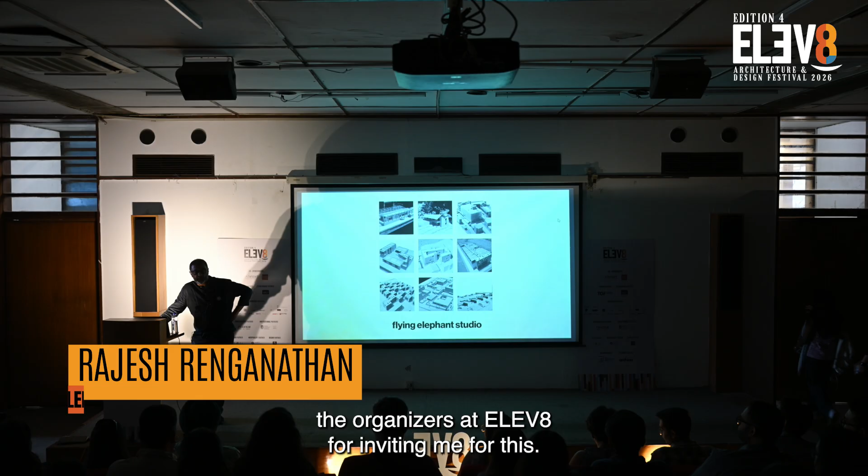Thank you to the organizers at ELEV8 for inviting me for this. It's always a pleasure to come to Ahmedabad, and we spent our formative years of architecture in this city, and we have a very strong emotional link with this place. And being in this building itself is something exciting. It's always nice to come to the Mill Owners, and personally, a building which has influenced me a lot.

So what I'll try to do is go through a selection of projects. I think there are about 8 projects that I'll run through, which in some ways may represent some broad trajectory of the kind of work that we're doing. So 2 of them are older projects of a smaller scale. Then there are 2 ongoing projects which are still at site and not yet complete, but I think they are of a different level of scale and complexity, which I would also like to talk about. And then there are some, over the last 10 years, a few of our institutional projects which have actually been completed.

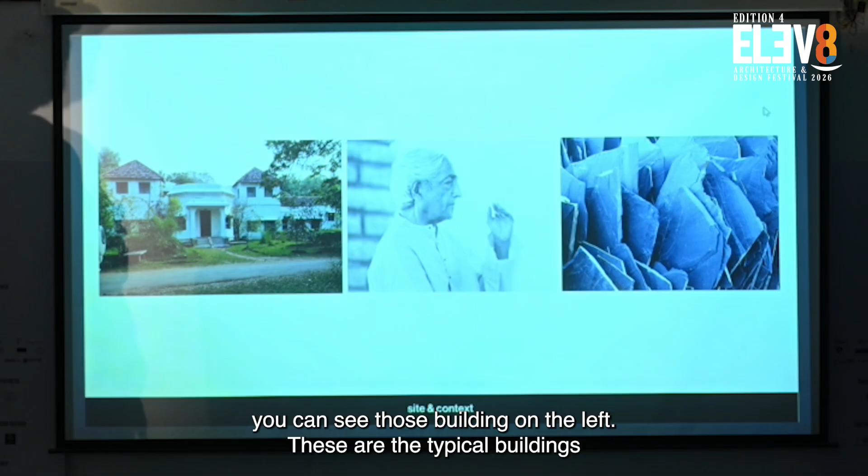And you can see this building on the left. These are the typical buildings which exist on the campus, very frugal and nice. There's also Kadapa stone there, which is used in that region of Andhra Pradesh. So it's kind of funny because it's a very high quality school, but you get a lot of privileged children who come there eventually and can pretend to be poor for a few years before they go back and get along with life.

So this was the building that we were asked to do, the senior girls hostel, as a dormitory project. And over here we had this very complicated relationship with the clients. We had 2 clients actually. One was the client who was donating the money and who selected us as architects. And then there was the school, so each had their own agenda.

The client wanted a certain kind of aesthetic, and which they came to us, but the school had its own priorities in terms of what they wanted out of the project. So it's a senior girls hostel, so there was a lot of tension between creating something which is closed and at the same time something which is set in a very beautiful natural setting and wanting to open out towards it.

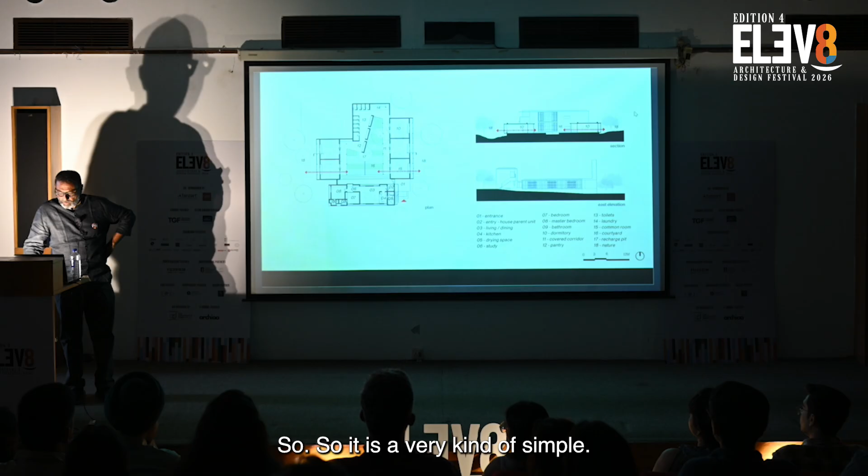So it's a very simple, sort of cloister kind of plan, and would have been a simple courtyard, but for an existing building which was there. And the way it works is that you have a cluster of 4 dormitories, each with 4 students, and then they have another building which is part of this complex, which is what they call a house parent. So a small 2 families live along with the students.

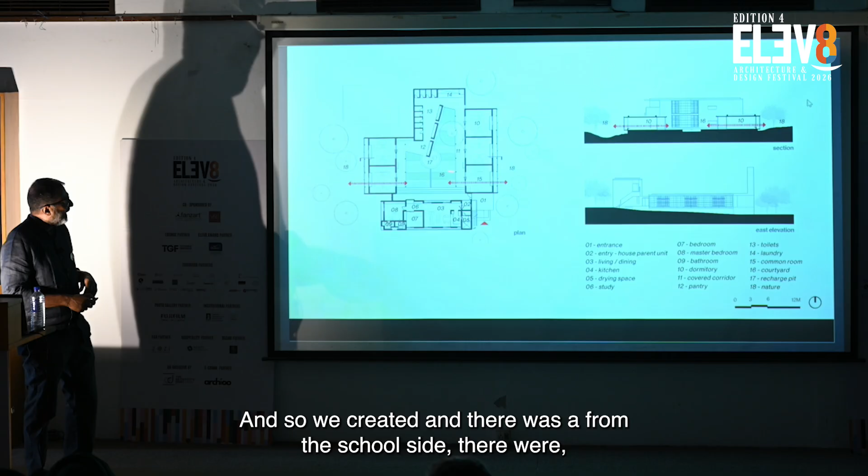And so we created, and from the school side there were worries about the safety of the girls. Being adolescent girls, they were very protective. So they almost wanted us to make some sort of a fortress, in terms of the entry and the visibility, so boys should not be able to come inside. And so this whole thing about supervision commands a view of the whole courtyard. There is no movement that can happen there without supervision.

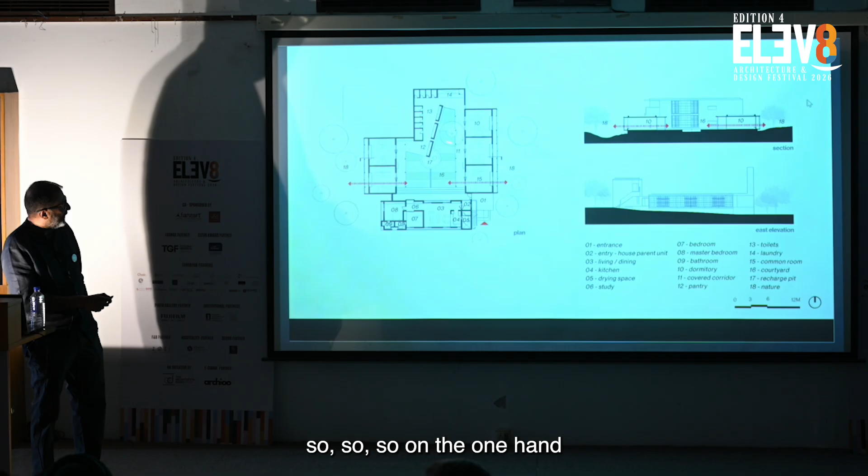But then outside it's all wooded, so on the one hand you create this kind of community space which is within the courtyard, but the rooms themselves, the dormitories, are open on both sides - on one side to the community area and then into the forest outside.

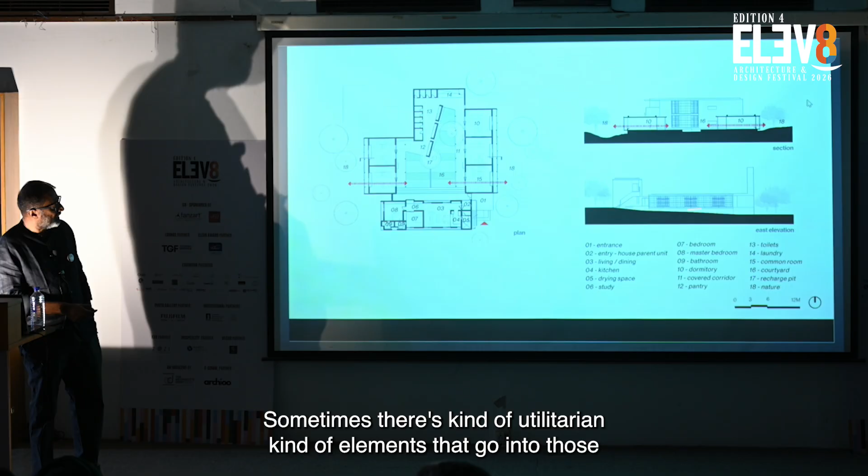And this was also one of the projects where we started working with these kind of layered facades, which combine various functions. Sometimes there's the typical weather protection, security grills, sometimes some utilitarian elements that go into those layered facades. So it's a theme which continues in a lot of the projects after this.

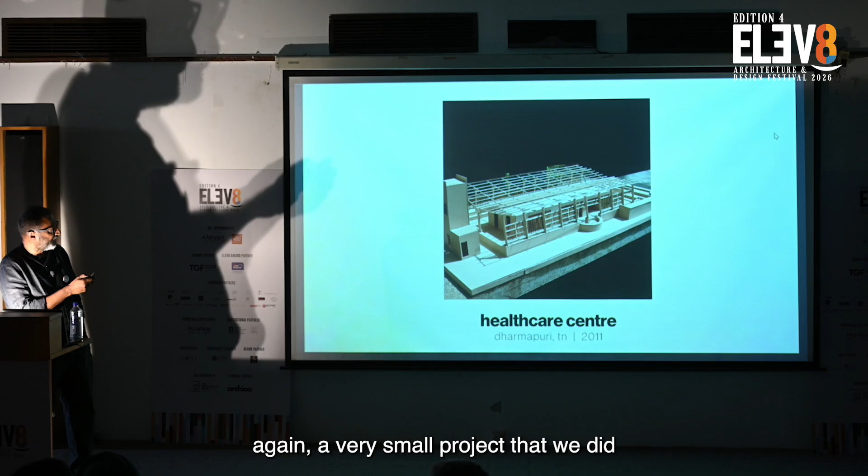So this is, again, a very small project that we did around the same time. It was just a primary healthcare center in Dharmapuri, Tamil Nadu - about 18 kilometers from Dharmapuri town, and it serves about 4 or 5 villages in that vicinity. It provides basic healthcare in terms of doctors and some testing facilities, so people don't have to actually travel to the town.

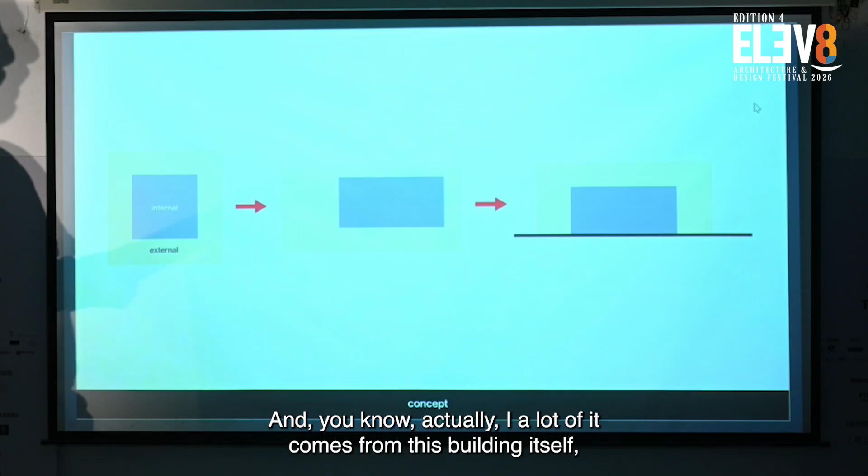So here again, another theme we've been working on, which is basically like a building within a building idea, and we've done it in several projects. Actually a lot of it comes from this building itself, which is that big box with a lot of objects inside. So it works very well even in terms of the climatic situation, being very hot, extremely hot and dry in this area.

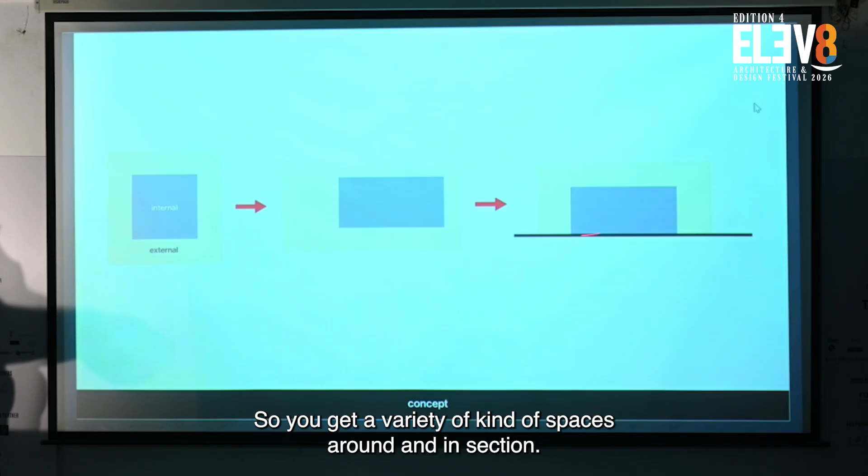So basically you start with the idea of an outer envelope and an inner core, surrounded by a buffer layer, and then this becomes a rectangle which is eccentrically arranged, so you get a variety of spaces around, and in section the same thing happens - you basically have this small core building within the larger building.

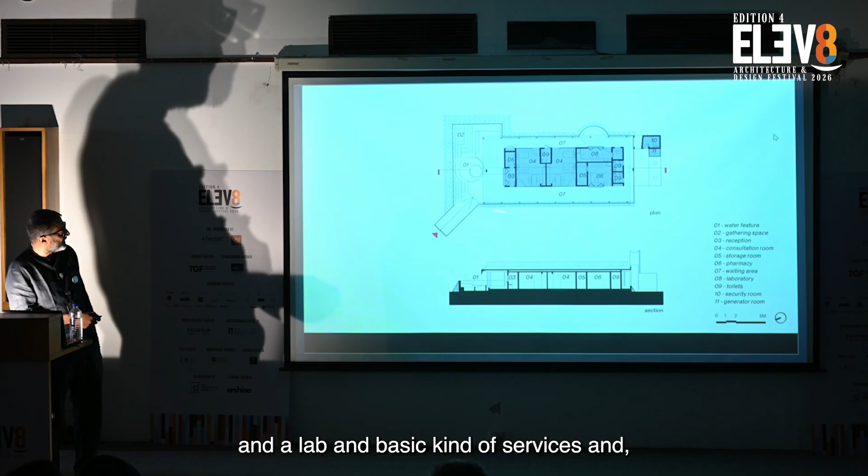So this was built at a very low cost. What I did was that the inside building was a proper sealed, secure building, which could be built to a decent spec, completely secure. You have the consulting areas again, which are open on both sides and well ventilated, a pharmacy and a lab and basic services, and a comfortable waiting area which opens out to the landscape, service area behind, doctors area behind.

And then I think because we had a little bit of savings from all the measures that we were taking, we got a little bit of extra space, which was a community gathering space, where they hold public health programs and things like that.

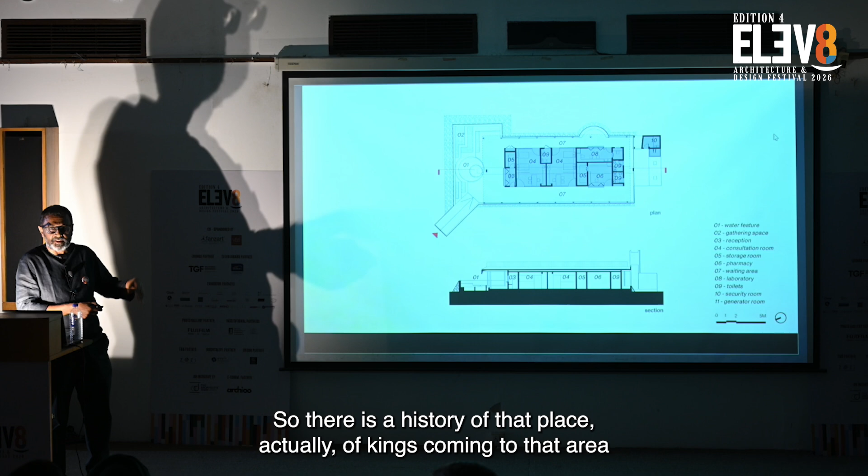And this place itself is called Devara Udu Palam, which means God's own spring. There is a history of that place, of kings coming to that area, and of some springs where they visited. So this idea of water as a life-giving element - this is actually built by a Christian trust - so the idea of water as a life-giving element was important.

Yeah, so it's basically a very straightforward kind of approach. There's a plinth, a large plinth, and then you have the core building which is a conventional RCC structure with an RCC roof which has that big gutter which collects the rainwater and puts it out into a water element there, and also stores it.

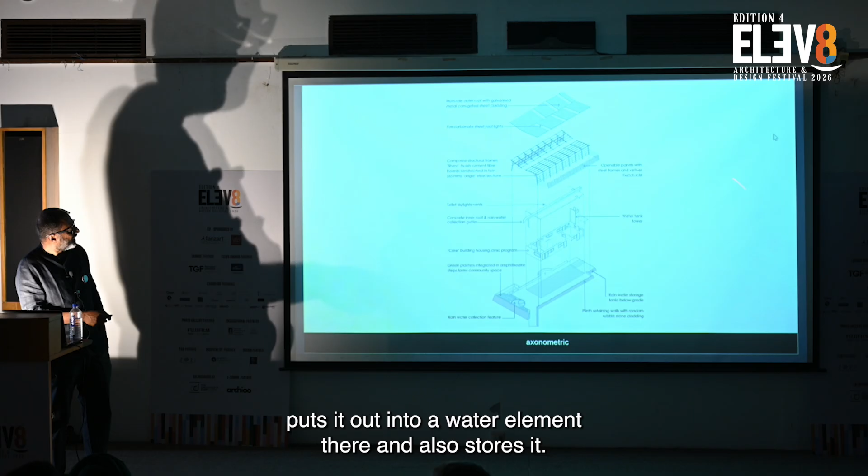And then a very light steel frame which is built on the outside, which has these louvred panels made of vetiver grass, called khas, which you can wet, and it creates this sort of evaporative cooling effect. So this was a very economical outer layer, the outer building, and of course a GI sheet roof on the top.

A lot of the stone was gathered from the site - it's built on one agricultural plot, so when you clear the site, you actually gain stone, and you construct the plinth out of that. And these screens which are there on the roof - a lot of the services are kept on top, so you don't need to get light even for the service areas, in the gap between the two roofs.

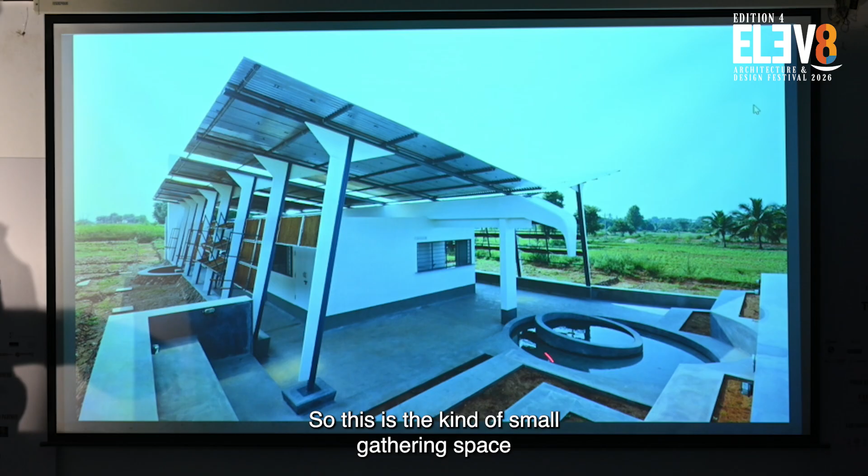And this is the kind of small gathering space that you get in the front, which is used for a lot of events. And the waiting areas, where you can control the amount of light that is coming, or the amount of protection that you want.

And of course there are different situations depending on the time of the day or time of the year. This was at the opening.

So yeah, this was again part of a family of a theme, this kind of layered facades, and sometimes using the space between the two layers rather than it just becoming an insulation layer.

So then I'll just jump to what's happening currently, and go through two larger institutional projects.

It's a large science museum which is being built, almost finished, in Patna in Bihar. So it's the largest science museum in India, probably one of the largest in the world. It's about 4 lakh square feet, on a 20-acre site, in the middle of Patna city.

So this was won through a competition, and these are government projects. Our client is the government of Bihar, and there's a series of projects which were won through competitions, and are of a public nature. So this is one of them.

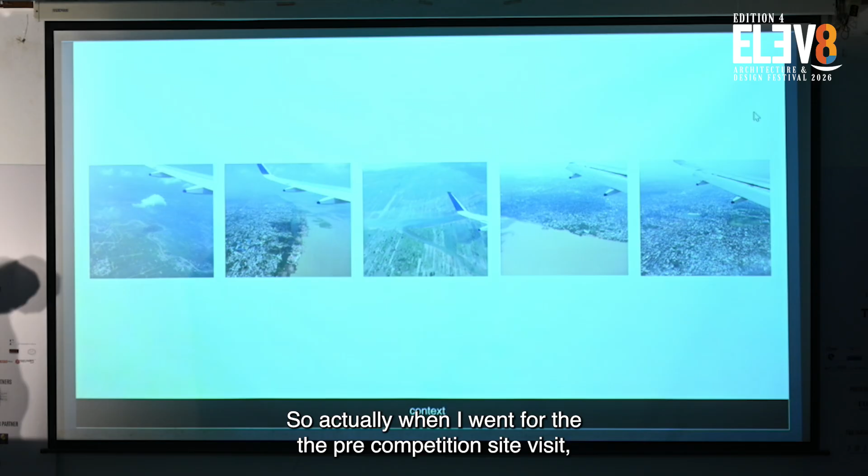So actually, when I went for the pre-competition site visit, I fell asleep on the flight, and when I woke up, we were flying over the Gangetic Plain. You could see it was post-monsoon. There was water collecting in various areas, and before you knew it, you were hitting the Ganga, with these brick kilns there.

And then as you cross the Ganga, you could see these tracts of - in these islands - this kind of agricultural, temporal agricultural practices. And then you cross the Ganga and you reach Patna over there.

And as the plane banked into its flight path, I actually noticed that we could see the site from the window. So our site was actually there. It was an interesting thing - this whole waterlogging, and the site itself being a low-lying waterlogged site.

That night, I spoke to some friends, landscape architects in Philadelphia, Anuradha Mathur and Dilip da Cunha, and told them about the site - I sent them these photographs, and they got very excited and said I should look at this. They sent me some material - Dilip was writing a book about some of these monsoon landscapes, and from that we discovered this whole thing of these areas where you have very heavy monsoon and flooding which happens.

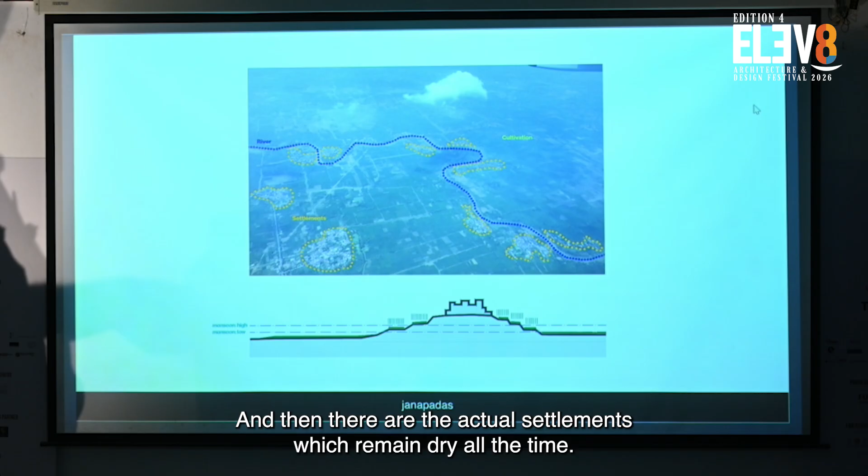What happens is that the settlements are built on the high ground, and then there is fluctuation in the level of water all around. There are places which could be wet all the time, like the actual path of the river, places which are wet some of the time and dry sometimes, and the actual settlements which remain dry all the time. Along this variation along the gradients, there are all kinds of agricultural practices that happen, which keep shifting as the season changes from wet to dry.

So this became a starting point for the project, and our site, again from that point, is sort of a panhandle kind of configuration.

As you can see, it's completely waterlogged, in a low-lying area. It was completely filled with garbage. The stadium is out here, the access is from one point here, and then there is this Nalla which runs — it's called Saidpur Nala, which is completely full of sewage and garbage. Not a very pleasant kind of site.

And as you can see, the site does retain water over a longer period of time, even when it's not raining.

So from the inputs I got from these landscape architects, I sent them a sketch which said that maybe the site can be divided into a low ground and a high ground along the periphery. The low ground accommodates some kind of water system and plantation, and the museum is on the high ground, with movement where visitors come in and service goes around. So when you look at it, this divides it into a low ground, high ground kind of situation.

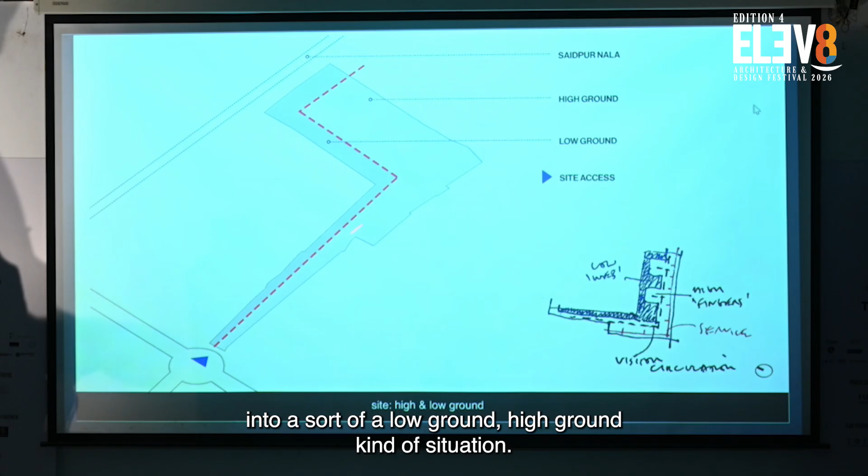So then it really becomes two projects in one. What we proposed in the competition was, one, the museum, which was part of the brief, but we also proposed a public park, which we initially wanted as a through and through thoroughfare, but that didn't eventually happen. So there were two parts to this project.

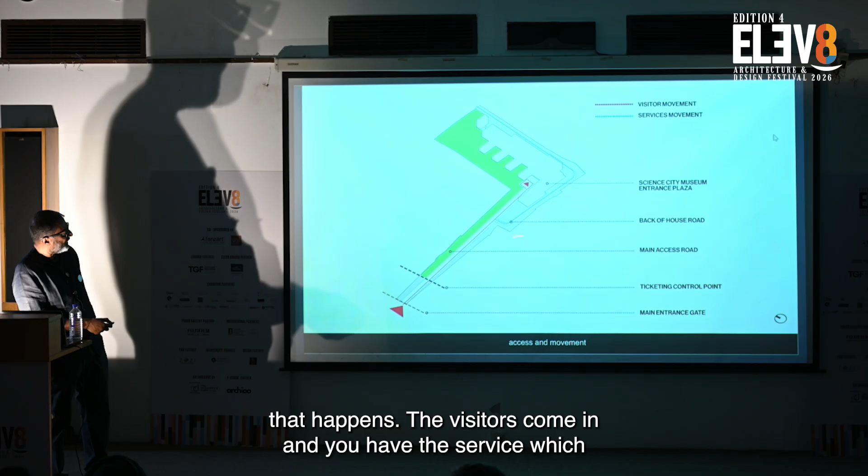And then of course, how the museum actually works — it becomes a sort of finger, these interlocking fingers of landscape and building, the high ground with the museum itself and the low ground which is the park. And then you have the circulation that happens, the visitors come in, and the service wraps around the whole thing.

Just to explain the program very quickly, you arrive at an atrium, and then you have some of the core programs around — the permanent exhibition on one side, temporary, and then a lot of public functions. And then of course the back of house and other kind of program which supports. There's a huge infrastructure that goes into even the back of house of a museum.

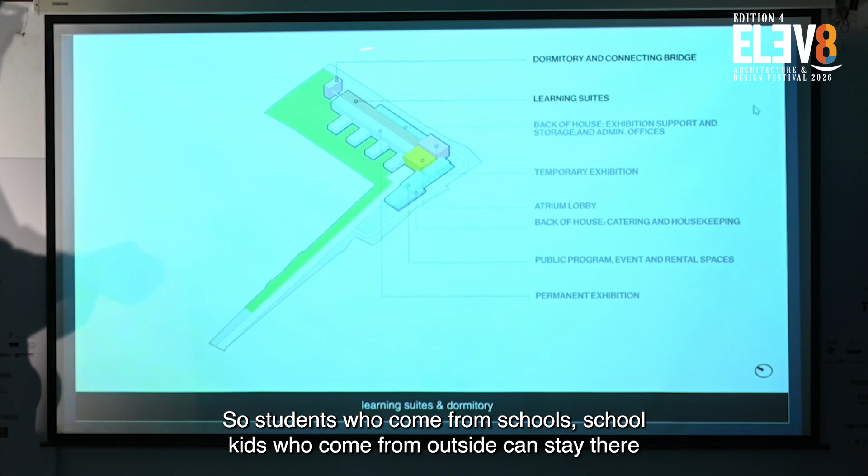So you arrive here, and then you have one loop which cuts through all the exhibition halls, and then you go to another level, or you could go to that level at various points. So there are many loops you can make — you go to the upper level and come back to the same place, or you come out into the landscape and the park, which is also an exhibit, a scientific exhibit in itself, and loop back here.

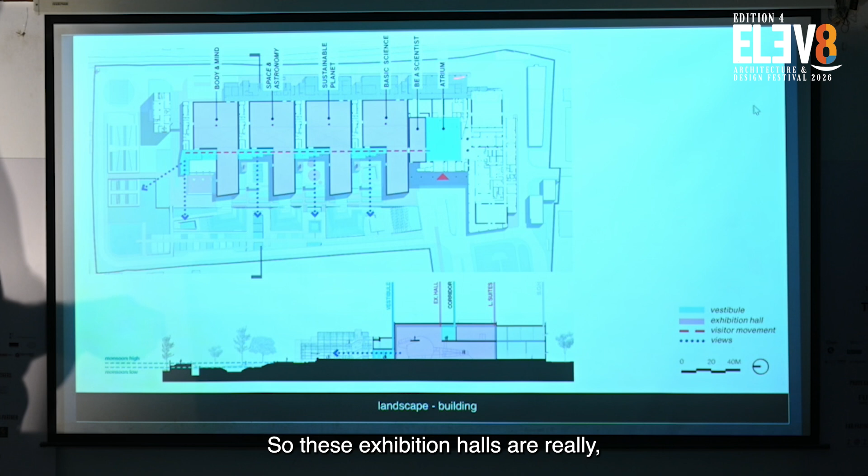Without getting into all the details, these exhibition halls are completely black box exhibitions, based on the brief from the museum experts. So there's one introductory hall, and then four large halls, each about 1,800 square meters.

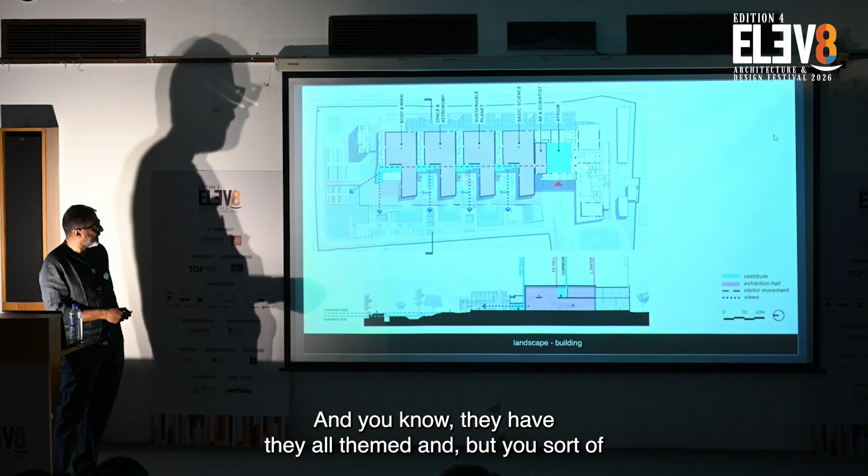It's pretty massive. You arrive at the museum in this atrium, and then move across. There's an introductory hall, be a scientist, basic sciences, space - they're all themed, but you cut across these halls rather than having an independent corridor system. You're actually cutting through the halls. So what we've done is have these huge halls with a lot of exhibits.

1,800 square meters is something you probably can't even do in a day, so you may breeze in and out and it's an overload of information. But at every point, you come out to a vestibule which opens out into the landscape. So there's this alternation of hermetic, sealed, dark space, and then this release into the landscape. That's very broadly it, and you have services and support facilities at each bay.

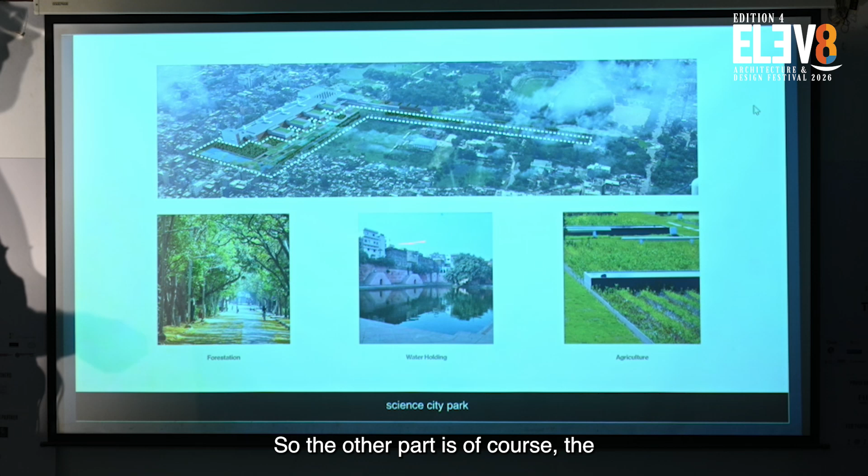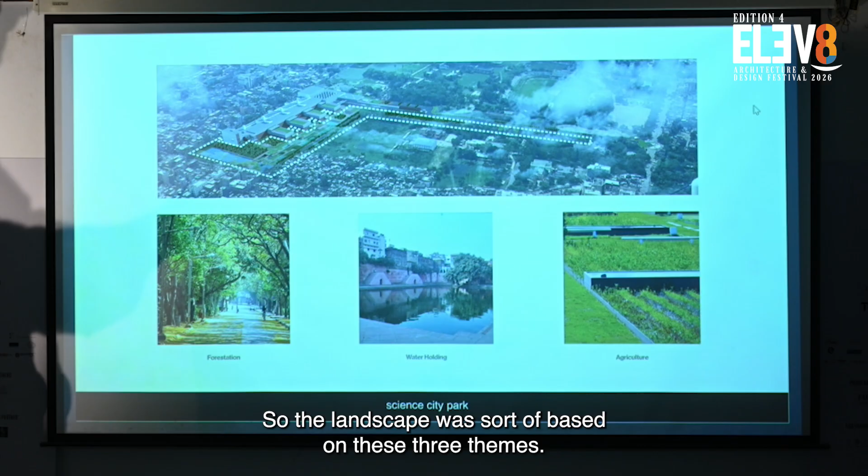The other part is the low ground, from the approach and about the park. The theme worked on was this idea of the forest and water - water as a theme was there at the start of the project. Then there was this aspect of agriculture, part of the chief minister's brief, saying there should be pride in agriculture, and that should somehow be included in the museum itself. So the landscape was based on these three themes.

Then there was this whole idea of flood mitigation - the site was used to demonstrate a flood mitigation strategy for the city. Patna gets flooded every monsoon, one or two occasions when the entire city floods. Being a low site, the idea was that you have low ground which can hold water, so there's retention within the site before it overflows into the municipal system.

So rather than just removing all the water from your site as quickly as you can, you retain part of it. It basically retards the whole process of discharge.

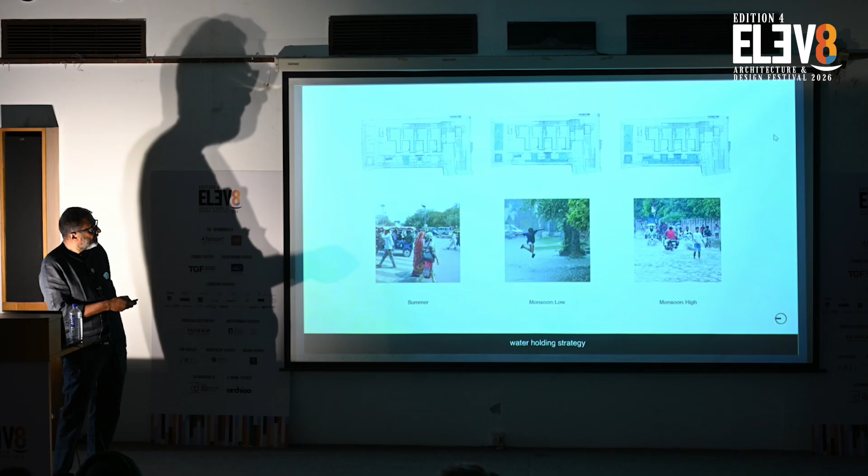It's also organized as a series of kunds - there's a stepped kund here, a ramped kund there, an irrigation tank there, and a system of retention and overflows from one to the other.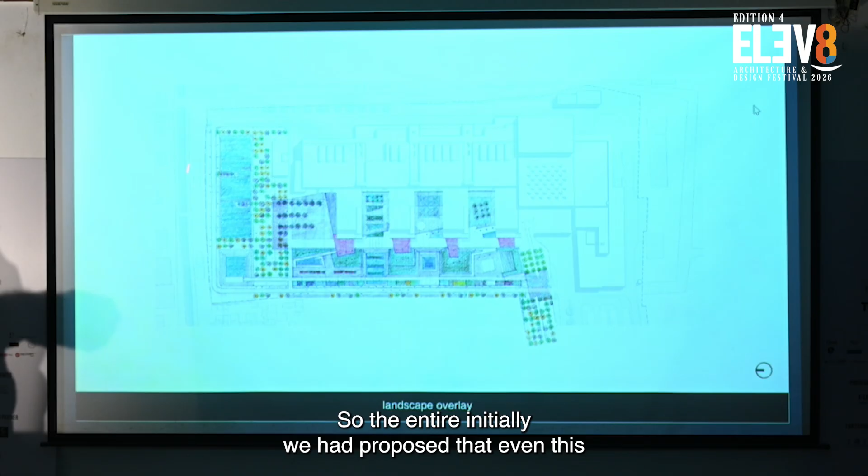There's also an entire biotic cleansing system. Initially we had proposed that even this nalla could be worked on, but that was cancelled by the client. So the entire sewage treatment of the museum is done here to a very high degree, and it's all very beautiful with plants and all that.

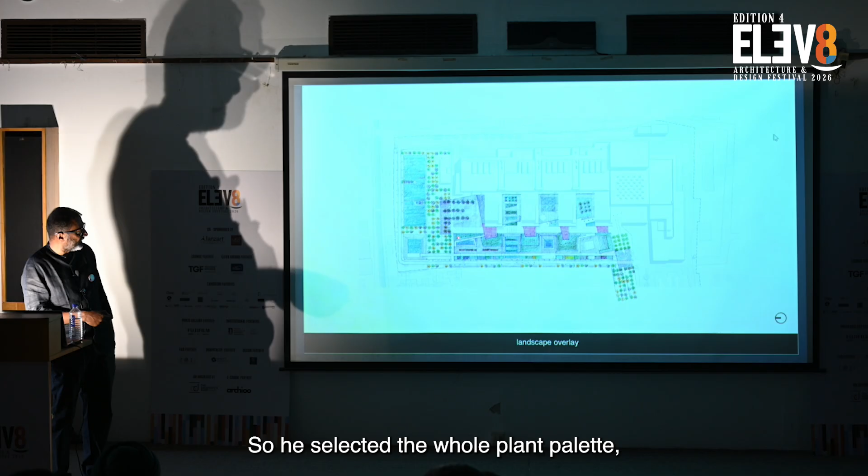It's a fairly elaborate landscape project with a lot of consultants, landscape consultants, and a plant specialist, Pradeep Kishan from Delhi, who has expertise in indigenous species. He selected the whole plant palette - something not commonly found in nurseries, which would become an educative part of the museum project. We converted the concepts they gave us into a very intricate landscape project.

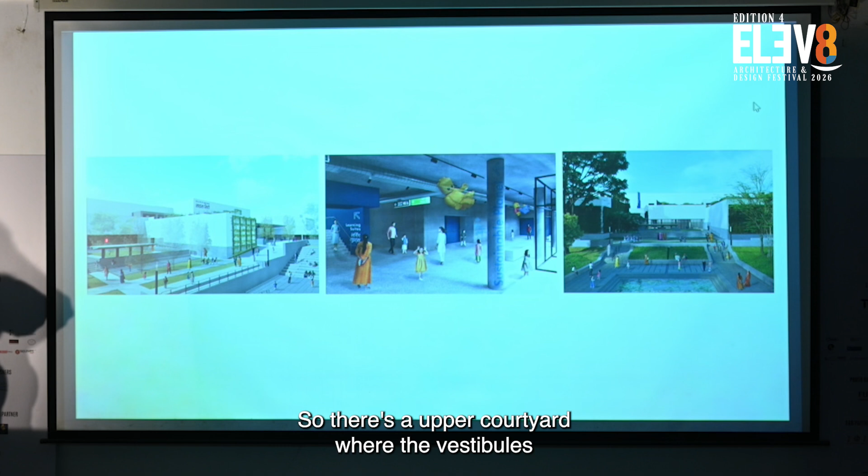It's still not fully documented - there are just some renders of this amphitheater and these kinds of things. There's an upper courtyard where the vestibules open out into, and then steps. You don't see the fire driveway from inside, and it steps down to the lower park area. These are the vestibules, and this is one of the kunds.

You get an overall idea, a sense of the landscape proposal from here. So these are the halls, and then the vestibules, the upper courtyards, the driveway, and then this series of kunds, the amphitheater, and the three kunds, and the whole biotic plant.

This model was done very nicely by an intern, Visishta, who sat on it for 1.5 months without getting up from her desk, totally focused on it.

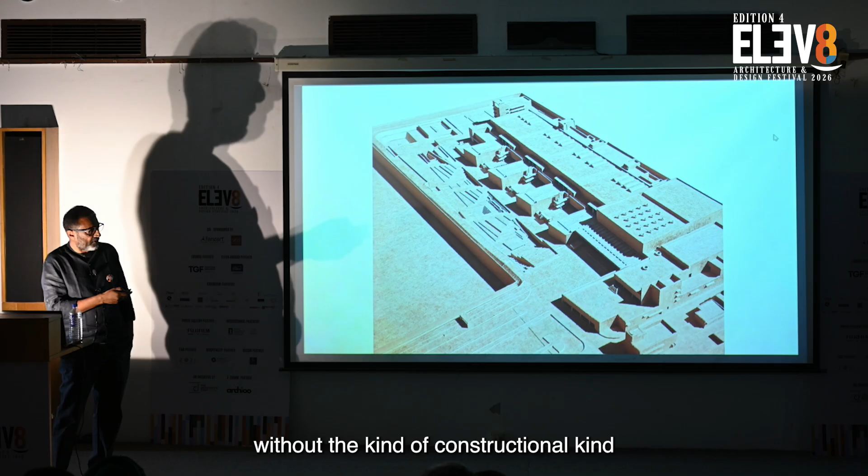So a lot of challenges in terms of this project, a government project. It's been going on—we won the competition at the end of 2017, started construction in 2019, and it's still going on. So a lot of compromises in terms of how the construction happened, but the bones of the project are intact, so it will still function as intended, but maybe without the constructional finesse we would have liked.

So coming closer to Ahmedabad, this was another competition for student housing at IIT Gandhinagar.

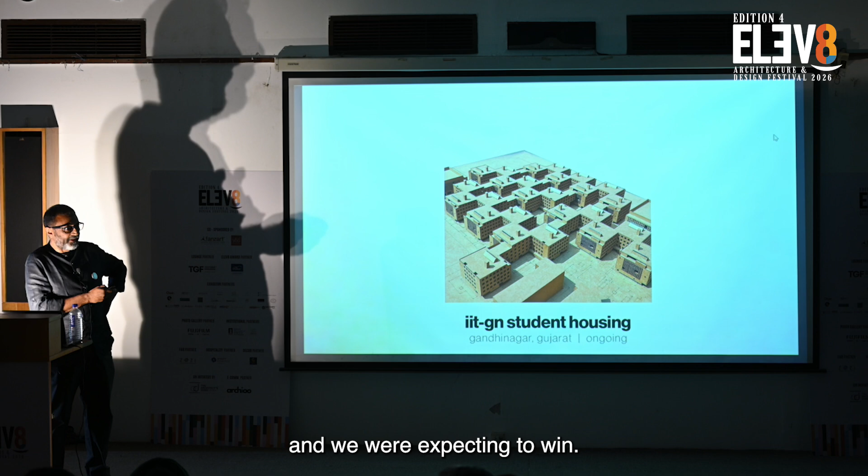Actually we had taken part in a competition for student housing at IIT Gandhinagar in 2014 or 15, and we thought we had done quite a good proposal and were expecting to win. But surprisingly we were out, so that was bad—we were disappointed and forgot about it.

Then about 9 years later, they sent us an RFP for the next phase of the student housing, and we submitted basically the same entry, adapted to a new site, and we won it. So that was very, very exciting.

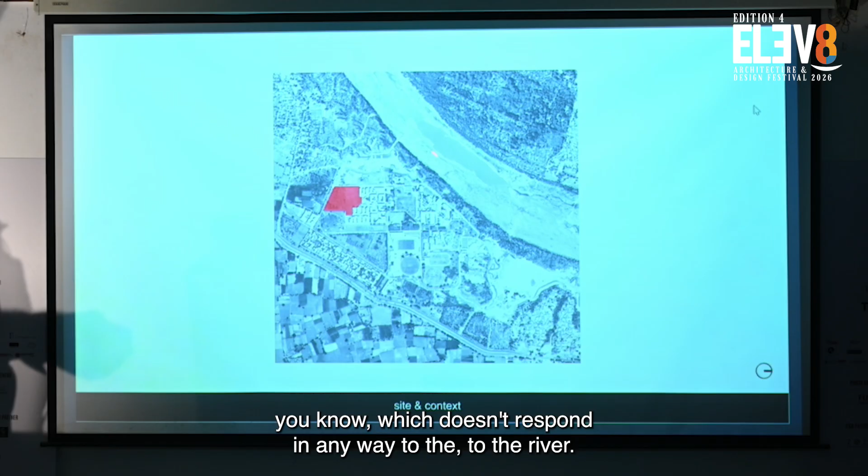So this is the campus, and, you know, a kind of strange master plan which doesn't respond in any way to the river.

And these are the existing hostels, and this was the kind of odd-shaped parcel we were given initially, to accommodate about 1,500 students.

Vastu Shilp has done the staff housing here, and HCP has done one phase of housing, and another architect from Delhi has done the second phase, where we lost the competition—that is here.

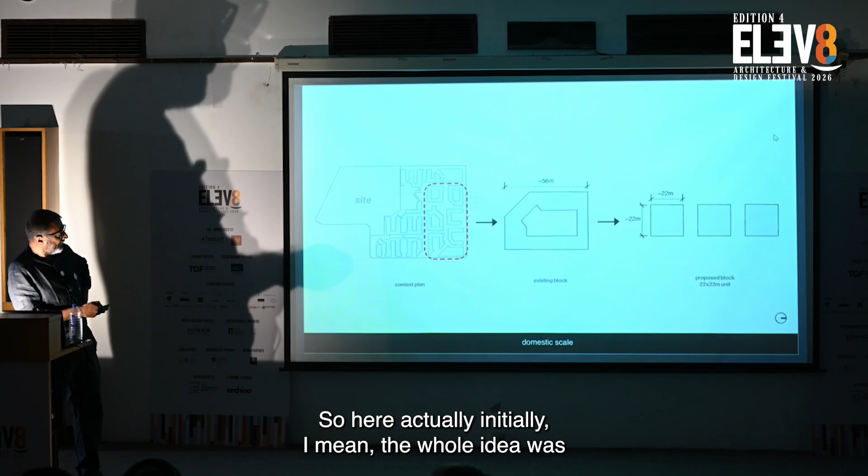So initially, the whole idea was dealing with this concept of big and small. This is the HCP module, with both C-shaped and one or two closed forms, about a 56, 60 meter footprint. We were wondering whether there could be a smaller grain to the project—what could be the smallest unit that could work with a central open space.

Or a central common area. So eventually we came to something workable, about 22 meters by 22 meters, which is a big contrast from what existed on the campus.

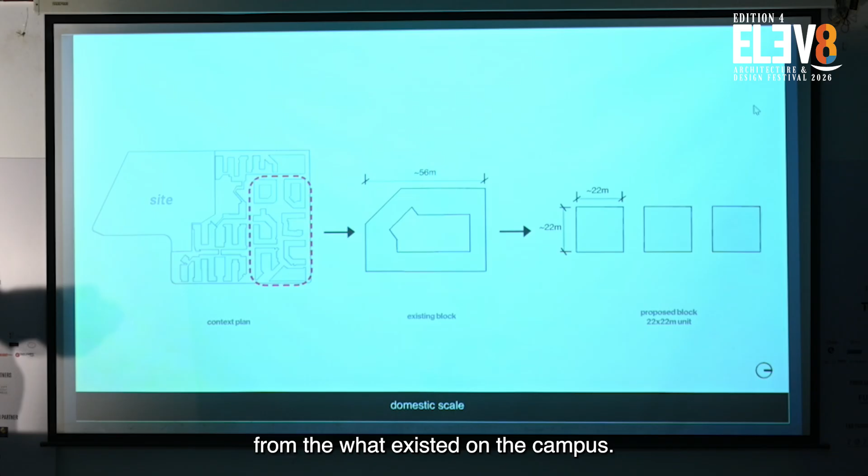We were also interested in how a module or small unit could occupy space—how do you fill the site with a module that repeats? A checkerboard is actually a very efficient space-filling pattern, because you get density but also the maximum distance between the buildings themselves. Then to increase density, you increase the overlap.

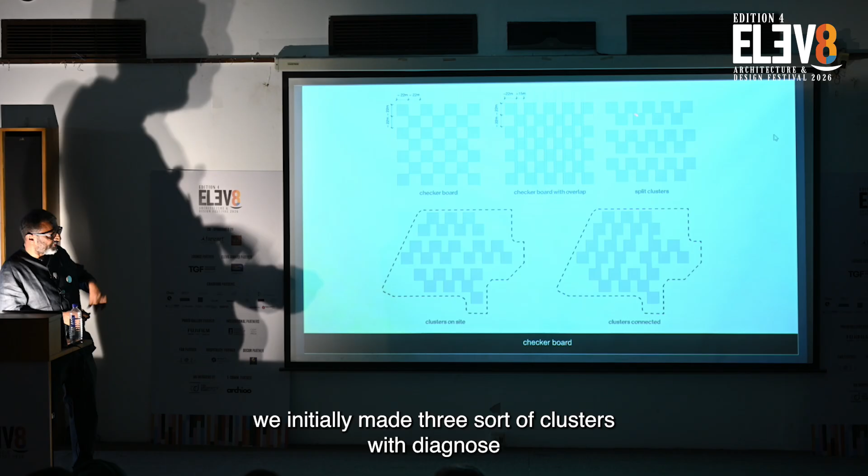Meanwhile, during the competition, we initially made three clusters with diagonals and so on. But after the competition they changed the brief and asked for increased student density—from 1500 it went to about 2600 on the same site.

There were also other requirements from the client, and we had some interesting interactions with students where we presented the scheme and got interesting feedback. So it evolved a bit differently from the original concept of three clusters with diagonals.

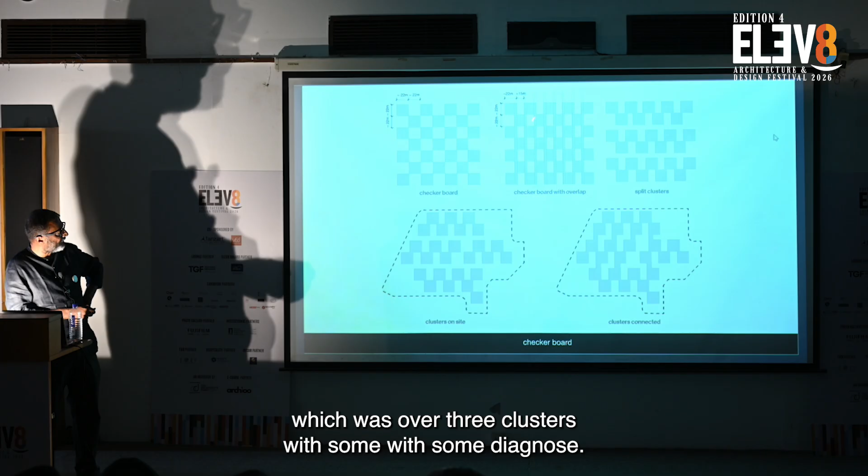As we increased the density, it split up into these forms, so you get fire driveways in between, and the advantage of a fine-grain modular approach is that it can adapt to all the nooks and corners of the site. And then, of course, there's something missing.

There are two dining blocks at these corners. And then, because they had given us a target of certain area per student which had to match the existing hostels, this was challenging for us because we actually had no rooms on the ground floor. We had all common facilities on the ground floor.

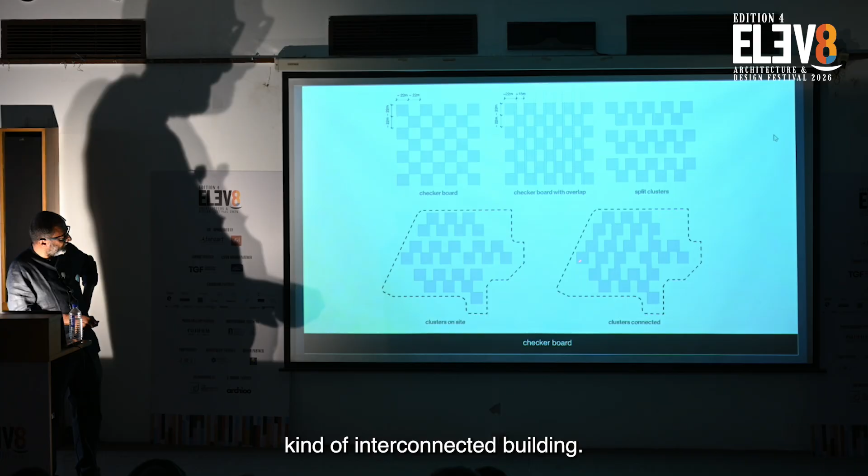So eventually, to increase the density, we started connecting them with program, not just bridges. So the small module actually became one kind of interconnected building. Actually, it's a single building.

Which has about 2600 students. I think the interesting thing is that it's both - at one level it is smaller than the existing hostels, but at the same time it's actually a much bigger building. And there was a lot of feedback from the students we got initially in the discussions.

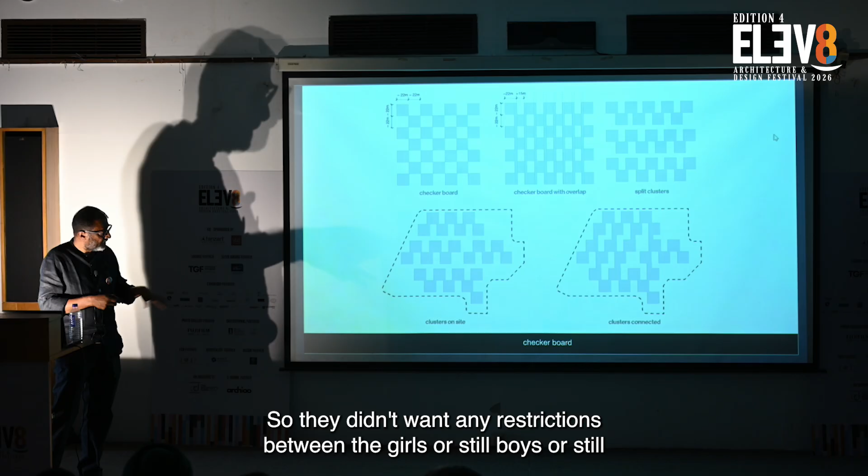They wanted to be able to move freely from one to the other, and they're quite progressive actually at IIT Gandhinagar. So they didn't want any restrictions between the girls' hostel and boys' hostel. They said it should be designed in a way that you can't do it.

So there's this one cluster over here, this five - that's the proportion roughly - which is actually girls' hostels, and then there's this entire...

So this then becomes one kind of interconnected module with all these courtyards, and then you have the sort of vehicular movement that goes under these.

And the other requirement from them was also to have shaded walkways, because it's so hot, and in these campuses to walk big distances can be quite tiring.

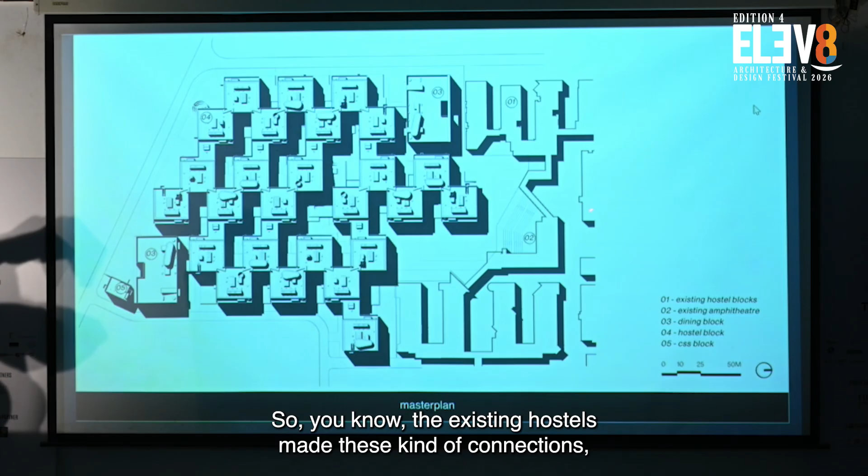So the existing hostels made these kind of connections, covered walkways, but what we did was we really integrated it into the building. So with this overlap on the ground floor, you have these internal streets that run, and this is actually what connects to the rest of the campus.

And then you basically have a cluster on the ground floor. Basically, you have all these common facilities, and you have an internal street. The entire residential part is lifted up with a sort of an atrium.

You have a lot of community facilities, lobbies, sports, and things like that on the ground level, which open out onto the courtyards.

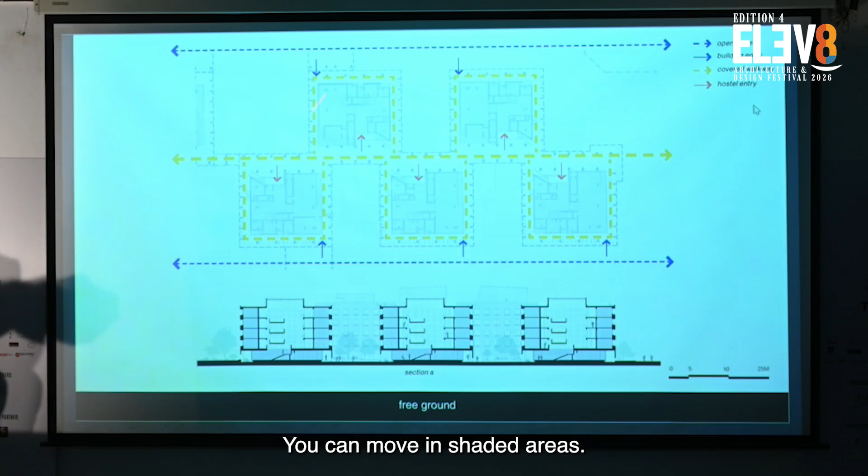And of course, so this kind of connectivity is very strong. In both directions, you can move in shaded areas. You have your cycle parking and all that.

And even at the, so you can move from one - so we're also trying to mitigate the effect of doubly loaded corridors, even though you want to get sort of high density.

But there are other programs that come in, so you have the whole washroom thing there, and then you sort of move around in these areas, and you can actually move from one block to the other, in all directions. So it's a completely integrated kind of facility.

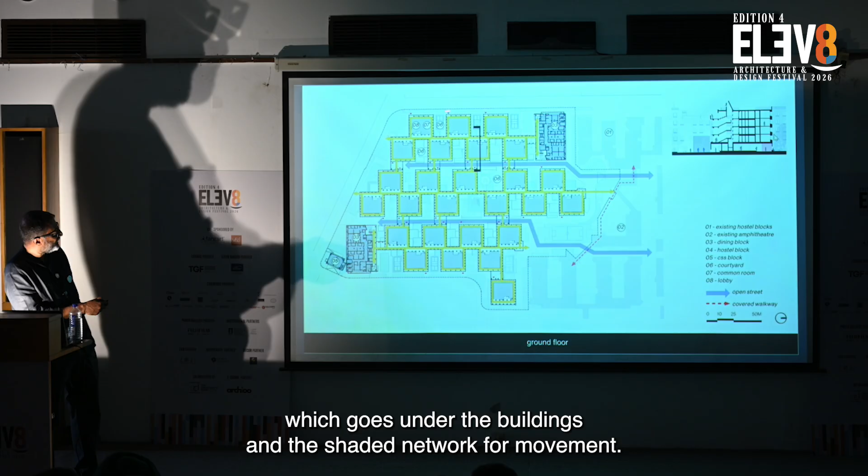At a broad level, on the ground you have the vehicular kind of movement which goes under the buildings, and this kind of shaded network for movement, and these kind of streets which run across with all the entrances.

So there are 26 entrances, 26 blocks. So it's very convenient - from A to Z, they can name it.

Yeah, so you get that sense of that whole. So it's both a single building and many buildings.

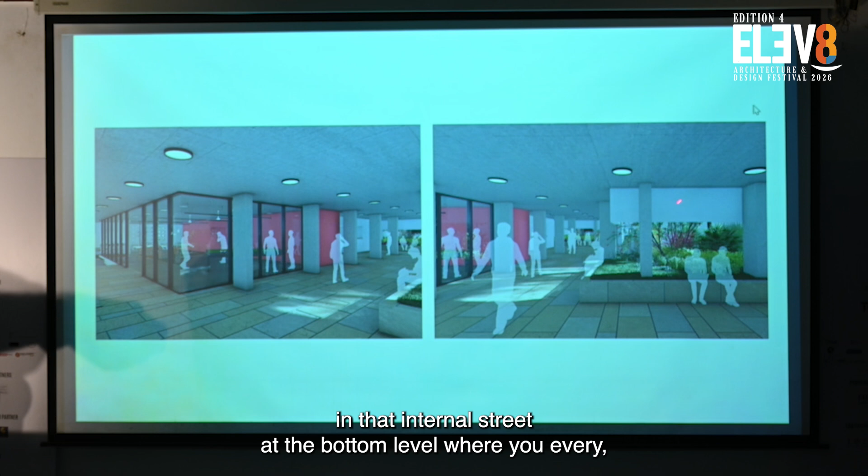And yeah, so it's under construction now. It's at the plinth level, but this is a sense of moving in that internal street at the bottom level, where you have these entrances to the hostel blocks, and then it keeps opening out onto these courtyards on either side.

And this kind of thing of the courtyards and the street that runs under, which - so you have rooms bridging the streets. And I think that was also interesting, because you sort of break away from the idea of vehicular movement creating these kind of blocks.

So actually, this was also a competition that we did, where we were lucky to qualify because they sort of relaxed the criteria. It was triple IT in Bangalore.

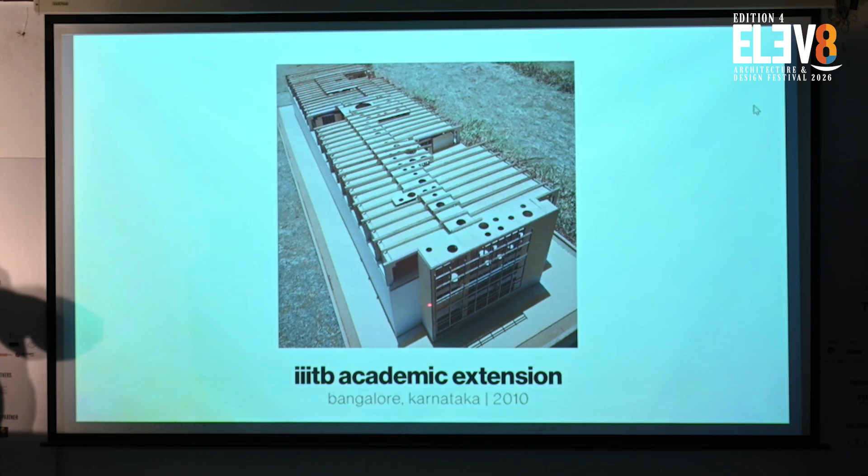So it was a competition for an extension of a floor.

And the site is sort of in an electronic city. You have - it's right opposite the Infosys kind of campus. It was an existing building which they had converted, an industrial building which they had converted into their academic block.

And this was the kind of roof that was available. They had a dome which reminded them of MIT and their inspiration, and then this kind of grid that was available.

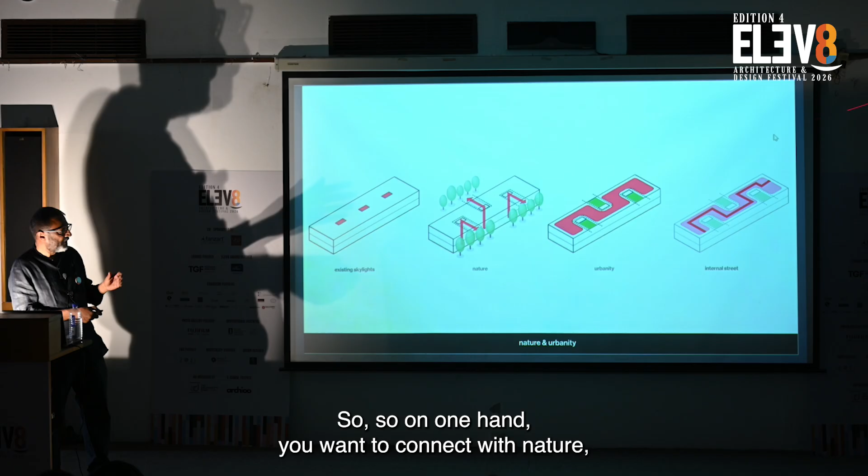So we were adding a floor here. There's this theme of nature versus culture, or nature and urbanity. On one hand you want to connect with nature, on the other you want to bring people together. There were existing light wells in the building, so we created terraces with a lot of greenery connecting to nature, and the program is wrapped around to create an internal street.

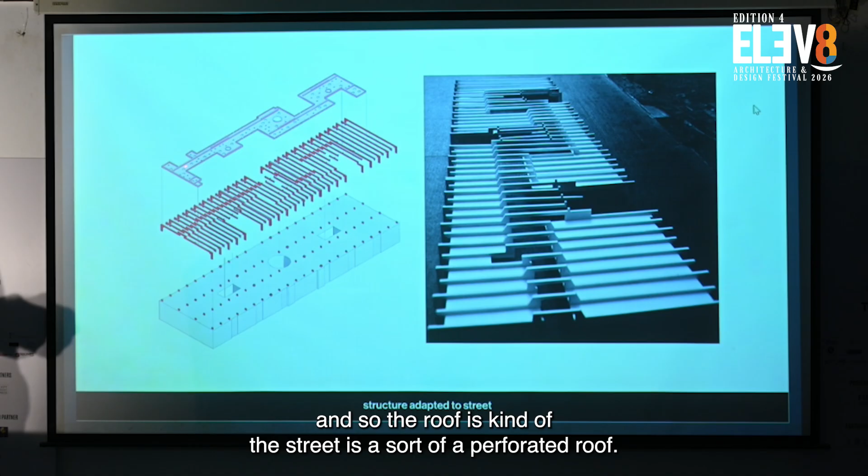The street has a raised, perforated roof, which creates a communal space within the building. We broke away from the grid of the existing building, so it shifts up and down, with portal frames that trace that profile.

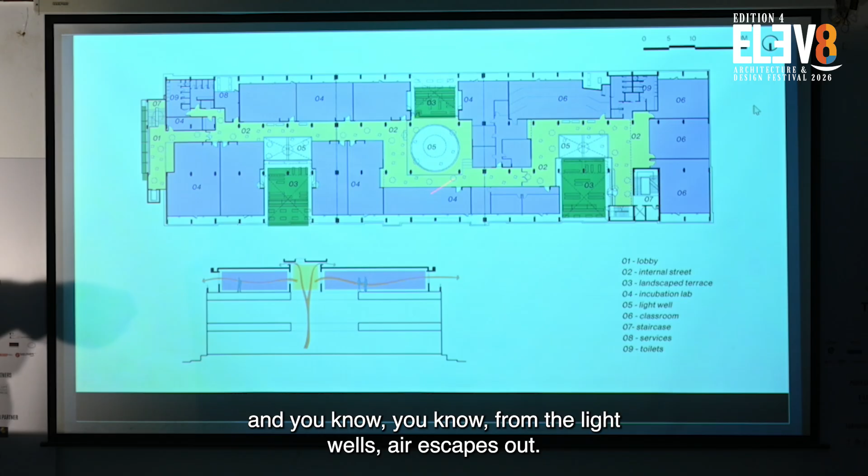So broadly, the program is there. You have the street with light coming from the top. We proposed that while all the buildings around are sealed glass blocks and they wanted air conditioning, which isn't really required in Bangalore, we allowed for cross ventilation, with air escaping through the light wells, so you don't really need to use air conditioning.

With the roof, which looked like cheese, these places were initially all agricultural lands with vineyards, so we proposed having a kind of vineyard on the roof. It became a wine and cheese roof.

It's also about old and new, and in this case we did the opposite of whatever was existing—the structure is exposed. This was an important project for us because it allowed us entry into that institutional space.

With government contracts, the RFPs require certain qualifications, so this project gave us a window to do some of the projects I showed earlier.

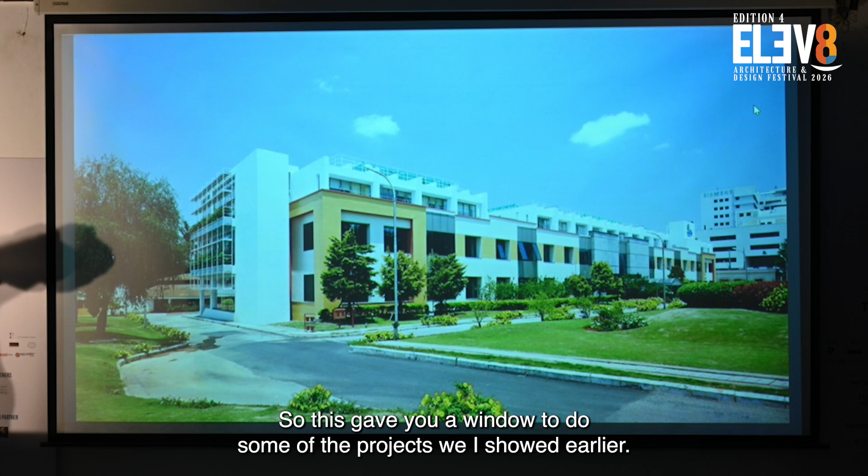In our approach we rebuilt the eastern facade, with this internal street running through so you can get ventilation across these spaces. A lot of traces of the old structure were left as is—the old dome, which was part of the original building, becomes a central area.

Bangalore has this condition where the light changes a lot during the day—sunny at one point, suddenly cloudy—so the building sort of records the changes of nature within it.

Again, there's this idea of connecting to the landscape, like an old English garden effect—it's like an infinity pool. Those trees across are actually 200 meters away at the Infosys campus, but we create this edge of the building which gives the illusion of the landscape coming in, along with courtyards and thresholds.

This is the eastern facade where they had a pond. It was quite challenging to add to a building which is occupied—dealing with old and new, and the logistics of executing something with a lot of construction and safety issues.

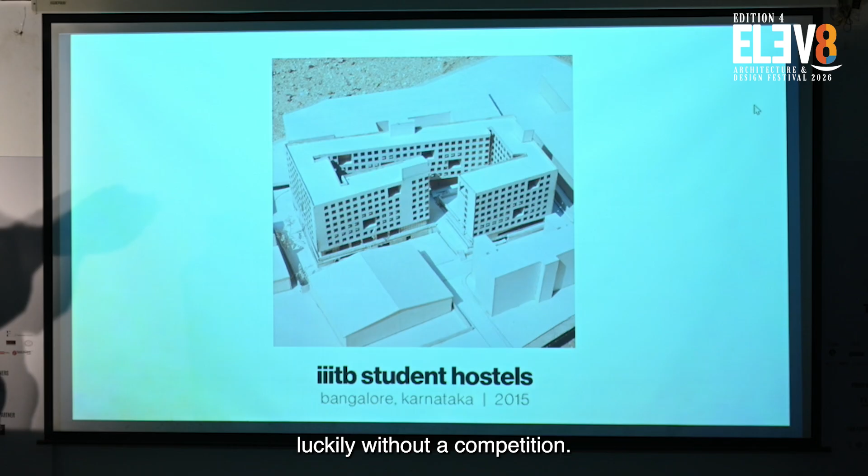After that they gave us another project, luckily without a competition. They had gotten 1.7 acres adjacent to their land and wanted 600 rooms for student housing, plus a student center, food court, and things like that.

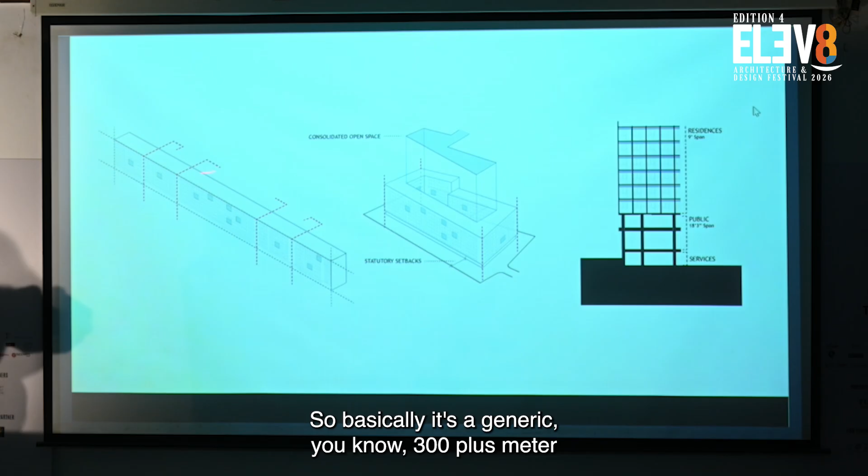It was a very simple, odd-shaped site with high density, so we couldn't avoid a doubly loaded condition, but we created an edge building with open communal space within. It's basically a generic 300-plus meter length with expansion joints, and elements like vertical cores, washrooms, and common rooms at a certain frequency, with disruptions to the doubly loaded corridor through double-height sky rooms.

This then bends around to occupy the site, creating open space inside, with a larger span structure below for all the public functions at a lower level—so the structure changes there.

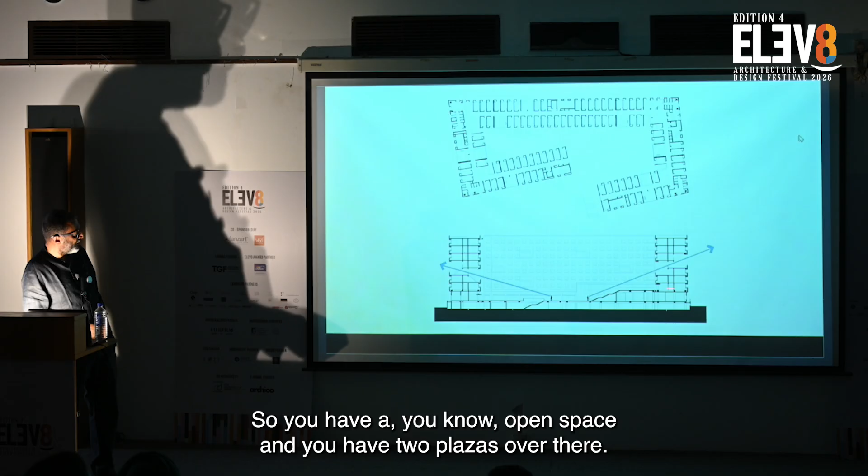It's a fairly straightforward plan. You have these disruptions every now and then. So you have an open space, and two plazas over there, then going down to the utility level where you have some of the kitchen and parking and all that. But you have this kind of two-level lower plaza and upper plaza. And then, even though it's a fairly constricted space, you get these kind of vistas out.

So coming down from the parking, you can see the two plazas. Nice to have dining areas which are open on both sides and more linear, because of the sound that normally happens in dining halls. So these overlooking double height spaces.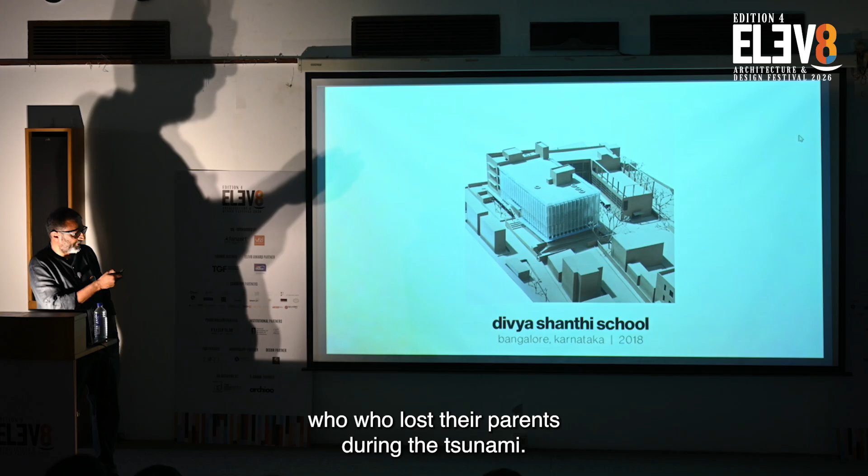So this is a project which was very close to our office in Bangalore, and it's an organization that deals with, it's in a very poor kind of neighborhood, so they have a lot of programs. There's a school, a children's home, a lot of children who lost their parents during the tsunami came here. So there's a kind of orphanage, children's home facility. Then they wanted, it's a complex kind of program, actually.

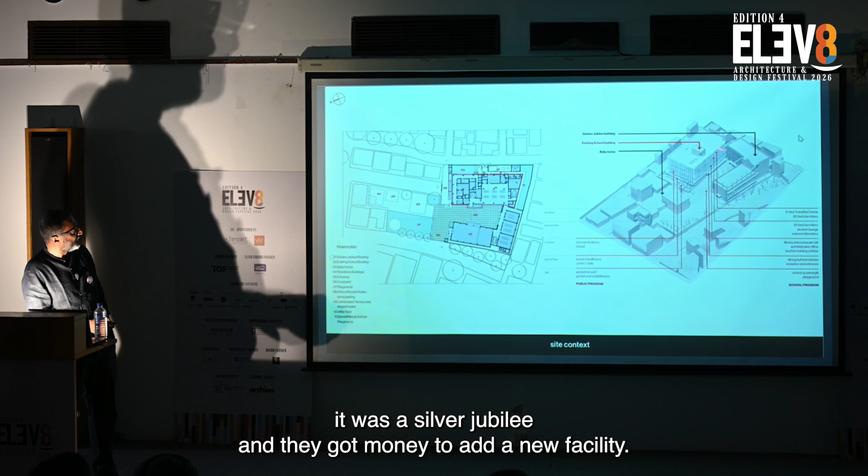In a kind of residential neighborhood with some existing buildings. It has a street on both sides, the main access being there. So there was this existing building. Some of the sheds were demolished. So they got this donation. It was their 25th, their silver jubilee, and they got money to add a new facility.

So we also renovated the existing buildings and added this new one, still trying to retain a sort of courtyard there. So the school access is from one side, and there is a primary healthcare center also included in the lower level, which is accessed from the street behind.

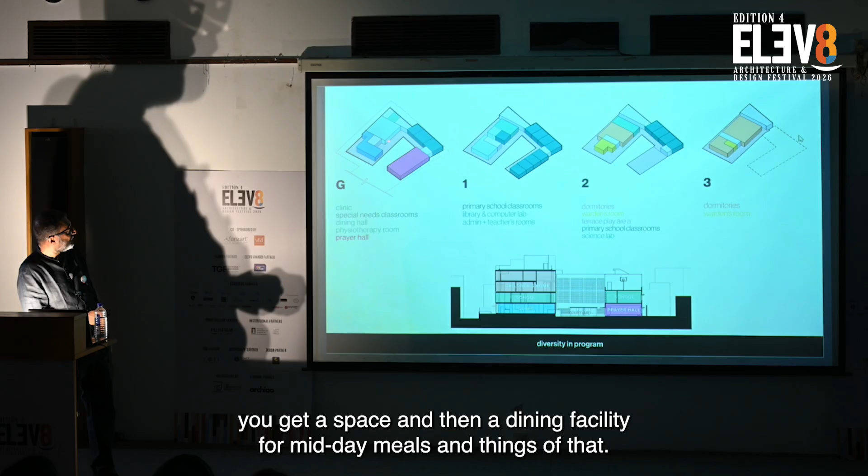So in this case, the interesting thing was that there's a very complex kind of combination of functions. Starting with a public function like the clinic, which occupies the ground floor. You get a veranda kind of space, and then a dining facility for midday meals and things like that. And then there's a prayer chapel there, and existing classrooms, a special needs center.

So the program has more of the academic facilities on this level, and as it goes up, it becomes more of a residential kind of facility. There are dormitories for small children. There's a halfway home, transition home for girls who, when they leave the facility, finally live together. So that was really the challenge, and also the program would keep changing, so we had to devise something quite flexible in terms of changing things.

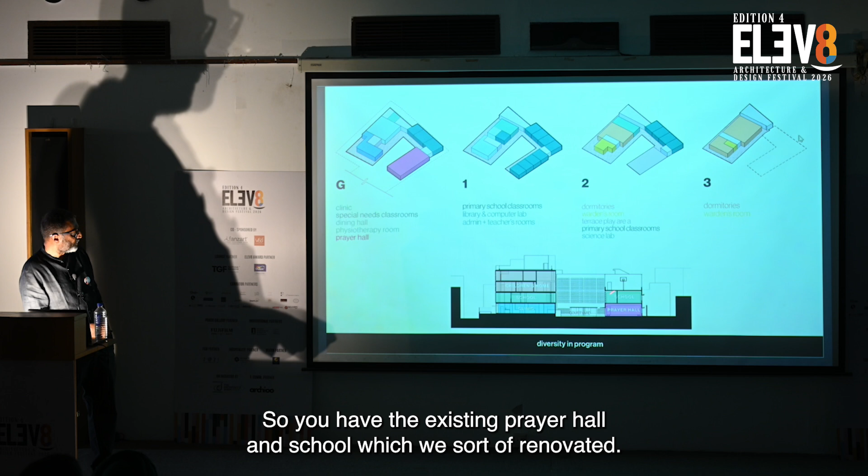So what you see in the section is the existing prayer hall and school, which we renovated. You have the clinic, school, and then the children's home above, and then access from both sides. And you still retain that sort of courtyard there.

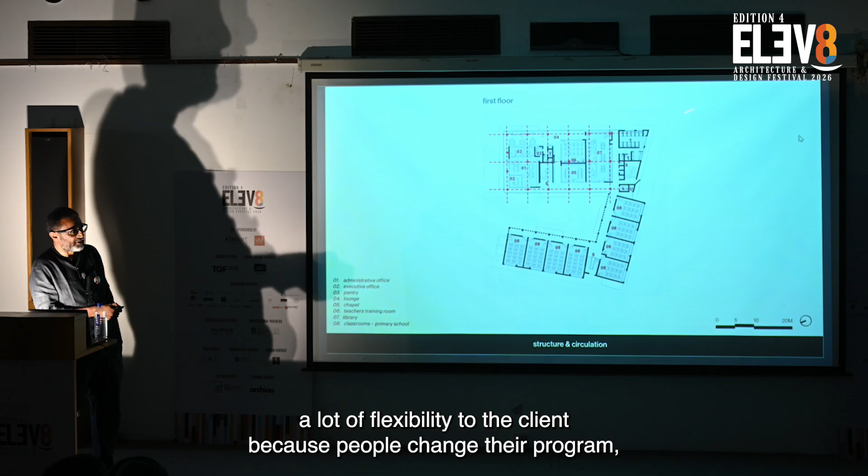So here we started going with this kind of flat slab system because it allowed basically a free plan with the structure being independent. So you could change the plan easily on each floor, and you didn't have to worry about beams and grids based on a specific beam plan. This is something we've done in a lot of projects after this. It just gives a lot of flexibility to the client because people change their program frequently, so it's nice to have that flexibility.

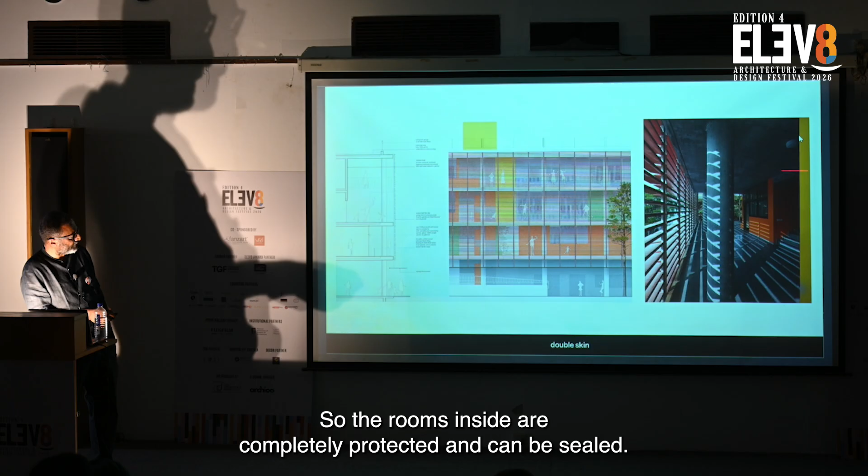Again, this theme of a double skin, like in a veranda, but translated into a multi-storied structure, so it can have different possibilities. In this case it sort of ends here, but sometimes it's just a double skin, sometimes it becomes a social space, sometimes it's movement - that threshold kind of space between the inner, again building within a building. So the rooms inside are completely protected and can be sealed, but you have an in-between space which lends itself to many types of programs.

So this is that courtyard over here, and there's also an existing baby home there, and this is part of the children's home on the top. So you get these kind of interests, and also there's a lot of noise, visual noise in the neighborhood.

So this kind of louver system - these are louvers which are fabricated, not a product. So it sort of neutralizes the noise in the neighborhood, and the neighborhood is also characterized by a lot of bright colors in terms of the houses. So we sort of took that language into the building.

Some of these niches are to be occupied by some equipment. So this idea of this kind of liminal space between inside and outside, and shadow and reflections.

I don't think this guy is hanging from it. Or yeah, so this is the last project, and it's something we finished recently.

So we've been doing these schools for the Azim Premji Foundation, which are all over different parts of India. We've done stuff in Chhattisgarh, Uttarakhand, North Karnataka, basically a lot of backward areas. And we did two recently in Rajasthan. This one is in Sirohi, which was finished about a year back.

It's actually a combination, typically on a 4-acre site, of a K-12 school and a district institute where they have their teacher training programs which work in the larger region, and in this case also a guest house, so people who come from neighboring towns or when they are training there can stay for a couple of weeks.

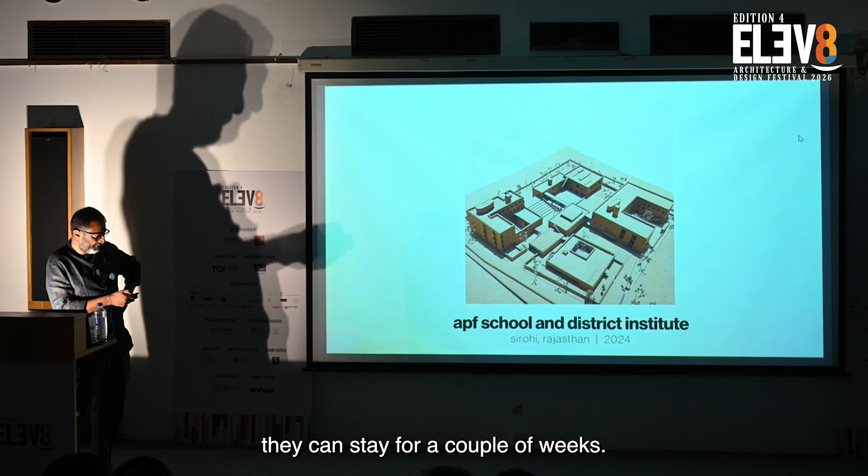It's kind of close to Sirohi town, and typically these are all in agricultural kind of settings, and you have a view of the hills which are close by.

So again, one project influences the other. We thought we would again look at this idea of the checkerboard in terms of the different program. You start with basically an open space and a built area, which is a sort of precinct, and then it gets built up into a checkerboard pattern which alternates built and open space.

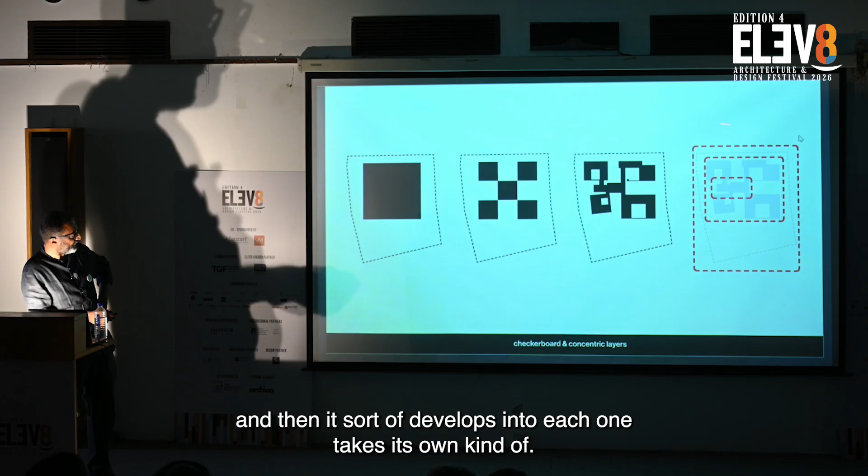As a generic idea, it then develops into each one taking its own kind of direction. There's a structure within which each one gets articulated according to its own direction. So you get this kind of result.

And here what we try to do is create this idea of a precinct within a precinct. So you have a core area, which is a shared facility of all the buildings, then you create a precinct which is all the main program areas, and a lot of the utilities and other things go in an outer layer which sort of disappears. So you get these layers within the project.

Here we also explored something different because we wanted to use stone masonry. What we decided is, okay, you have the load-bearing structure, typically with thick walls, then you have the frame structure. So what we did was a hybrid, which uses 450 or sometimes 600 thick stone on the outside, but it has a frame within.

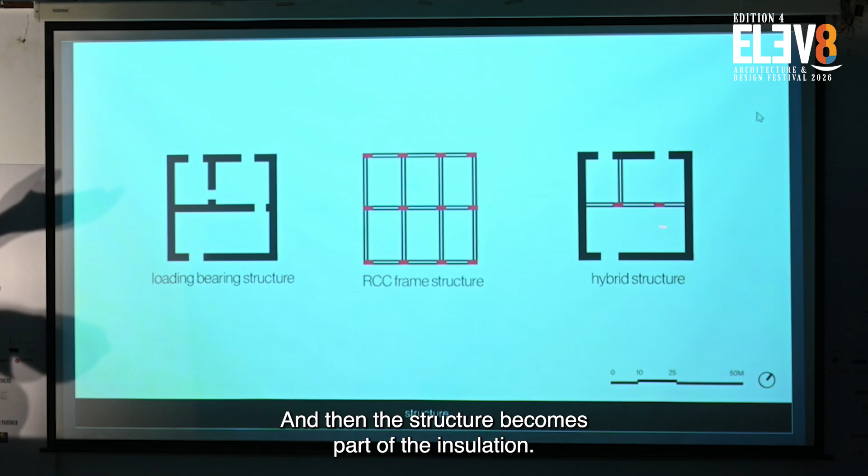So you really need the flexibility inside, and the structure becomes part of the insulation. It gives depth for recessing your glazing and things like that, and it also becomes the identity of the project.

So this kind of cluster of 4 blocks with a central facility includes an open hall on the ground floor, a library, so that there's the primary school, secondary school, district institute, and the guest house facilities. Broadly, that's the structure.

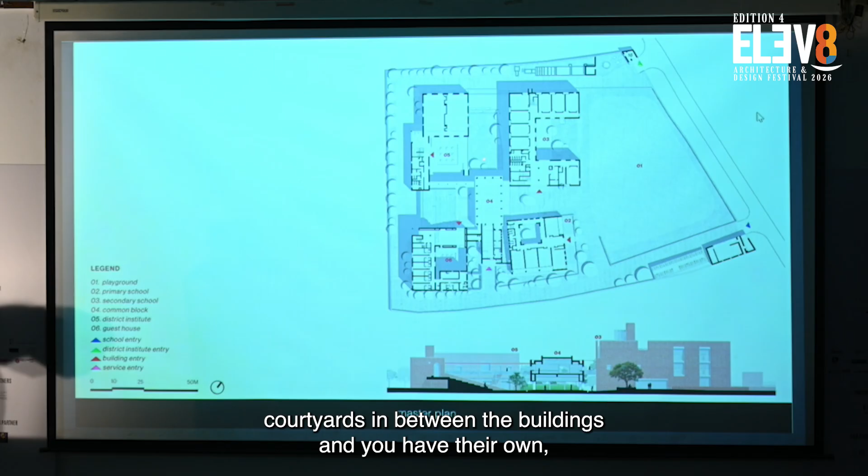So you have these 2 levels of courtyards in between the buildings, and each has its own open space within. This is the section cut across there, and this is the sort of inner layer, where you tuck in a lot of your utilities and parking on the outer layer, which is not visible from inside.

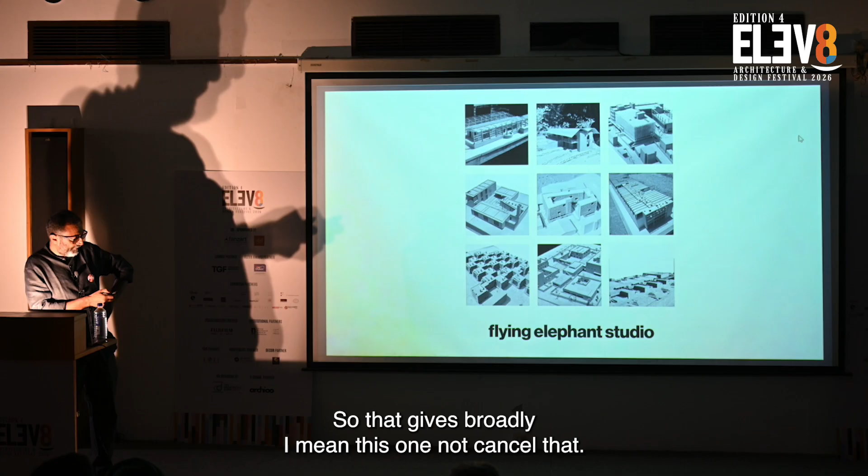So that gives broadly - I mean this one I've not cancelled, it's getting too long - but that gives a sort of broad trajectory of what we've been doing, and the challenges that we've faced, and the way our practice has evolved and continues, hopefully, to do so if our profession survives. We are still in a process of moving forward, and haven't lost our appetite for continuing practice, despite the fact that we complain a lot. So that's it, if you have any questions, thank you.